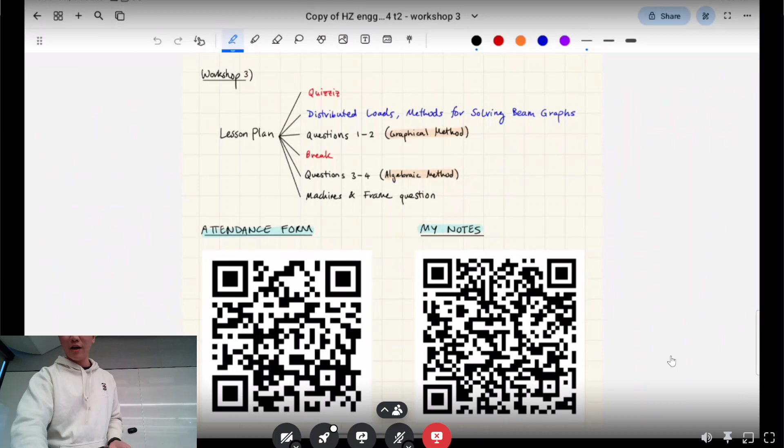Just to get the admin stuff out of the way first: the bottom left is the attendance form, so give that a scan and sign in for this week. The bottom right is my notes. I like to go a bit quickly sometimes, so if I scroll past what you're writing, you can always refer back to this. I've got the work-in-progress document for Workshop 3 up right now. That's what I'm going off of, but more often than not I'll make a little mistake and try to fix it up, which is why I call it work in progress. When that 'work in progress' label is off the name, you'll know it's the finalized document.

In terms of our lesson plan, at the start it says the quiz is first, but I'm going to change that real quick. We'll do the quiz after I go through the theory. Is everyone still scanning that?

This week we're going to go through distributed loads and methods for solving beams. The focus of this week will be beams, and then we're going to go through some questions as well. I'll teach you two methods for solving beams: one I like to call the graphical method, and one I like to call the algebraic method. I'm not sure if these formally have official names, but I'll go through each in more detail. At the very end of this week, I'll also cover machines and frames, and explain what those are in the context of this course and how it's taught in other schools.

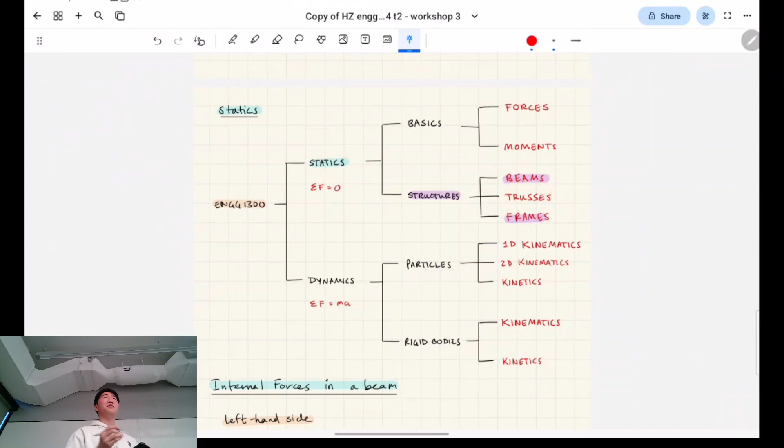In terms of our tree diagram of the progress of this course, I showed this the last two lessons as well. We're still in statics, which will be the first half of our course. Now we're getting more into the actual structures specific to civil engineering and structural design. We'll be talking about beams extensively this week, and next week we'll focus on trusses, assuming the course hasn't changed. I'll briefly touch on frames, but you won't be assessed on those until later in the course. The focus will be on beams. Interestingly, in the mech school they teach trusses before beams, but in civil school they teach beams first. They're both difficult in their own way, but for different reasons.

Okay, so internal forces in a beam. Basically, with Newton's third law, the free body diagram law essentially, you can slice the analysis of a beam such that it crosses over the middle of it. When you expose what's inside a beam, you'll see there has to be a counterbalancing force for the external loads. These are called the internal forces in a beam, and there's three kinds of actions that they have to counteract.

V stands for your shear force. Shear forces are like perpendicular loads, loads which are perpendicular to the beam. Remember, a beam has this axis that runs through it like that, so these are the perpendicular loads. N is our axial loads - we've talked about tension and compression, those are axial loads, and those will be represented using N.

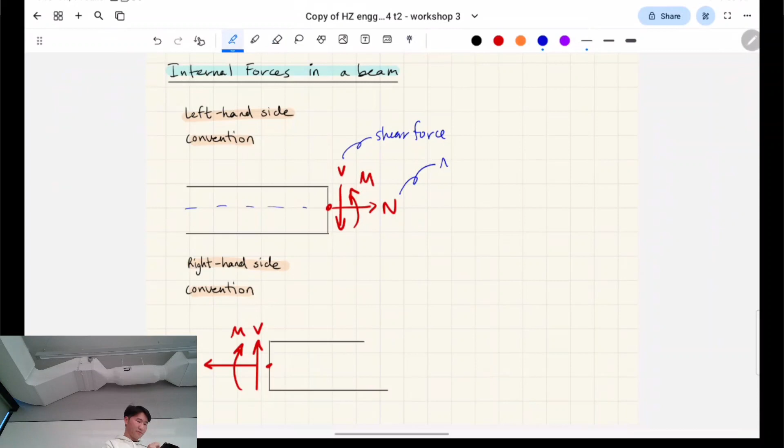And lastly, we have the internal bending moment, M. What's important is that we have a left-hand side and right-hand side convention, because when we plot out what we call the shear force diagrams and bending moment diagrams for beams, you have to graph along the beam, either going from left to right or right to left for it to work out. Generally I like to stick with left-hand side convention, but you'll see in one of the questions I've shown below that it's sometimes advantageous to go right to left instead.

Essentially, we're just using the tools we've been talking about over the last few weeks to solve these - that's the equations of equilibrium. We can literally just use these ones. Let me just move a few things around real quick.

You use the sum of the vertical forces equal to zero to solve for your shear force. If we take our free body diagram cut and expose the internal forces, those will be part of the forces we have to consider when looking at all the vertical forces, and we'll be solving for V, the shear. For the axial forces, we'll solve for N using the sum of the forces in the X direction. And the sum of the moments around the cut gives us M. This internal bending moment is happening about where the cut is - even if I draw the counterclockwise arrow going there, we're referring to this point here, exactly at the cut. This will make more sense when we see it in practice in the question.

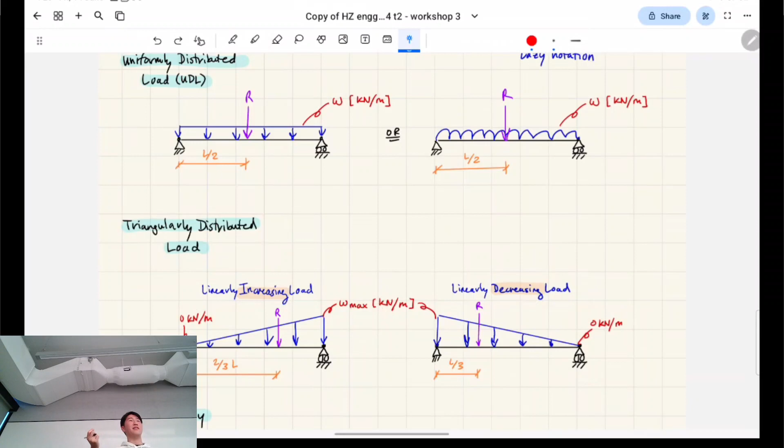If we get a bit more complicated, we have triangularly distributed loads. There are two types: linearly increasing loads and linearly decreasing loads. You don't have to be super technical explaining these, just know they exist. For a triangle, the magnitude is always 0 on one end. In the linearly increasing case, it starts at 0 going left to right. In the linearly decreasing case, it ends at 0 going left to right. The other side we call W max, because W can be graphed like a function, like in high school with x and y on a Cartesian plane. We replace this with W on the y-axis, and x still denotes how far along the beam you're going.

For a triangle, the center of force is 2/3 along the beam from the small side, or 1/3 along from the big side. You'll have to get familiar with that relationship. So for a triangle, it's always 2/3 from the small side or 1/3 from the big side, which is where the resultant force will be.

How do we get the area of this resultant force? If we viewed the previous one like a rectangle, we can view this one like a triangle. To get R, our resultant force, you multiply this axis by this axis and divide by 2 — area of a triangle, base times height divided by 2. When you get that area, that's R, and the location of the R point load is what I said earlier.

We get a bit more complicated when dealing with trapezoidally distributed loads. It's still linearly increasing or linearly decreasing. Instead of one side equaling 0, we have a minimum and a maximum for the distributed load magnitude.

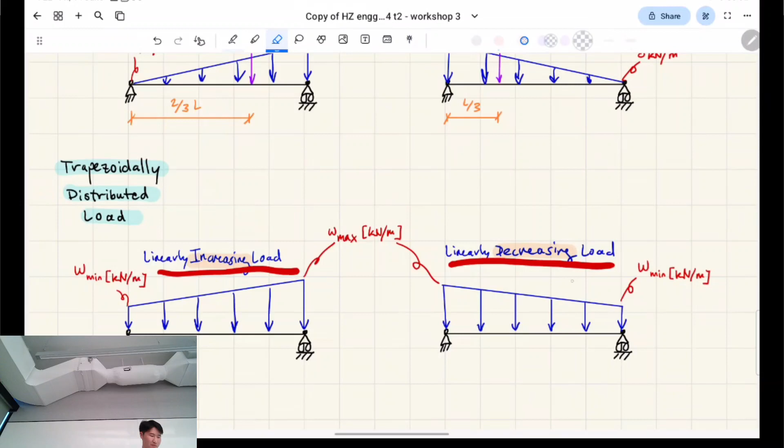Often, we can just divide these up into a triangle and a rectangle — that's how I'd do it, to avoid unnecessary integration in calculus. There's a principle of superposition in statics which says this trapezoid is the same as stacking a rectangle on top of a triangle. The resultant load for the rectangle is in the middle, and for the triangle it's 2/3 along from the small side. You can call these R1 and R2 and do your calculations from there, but this case is fairly rare — I doubt you'd get it on the week 5 midterm, though it's possible in the finals.

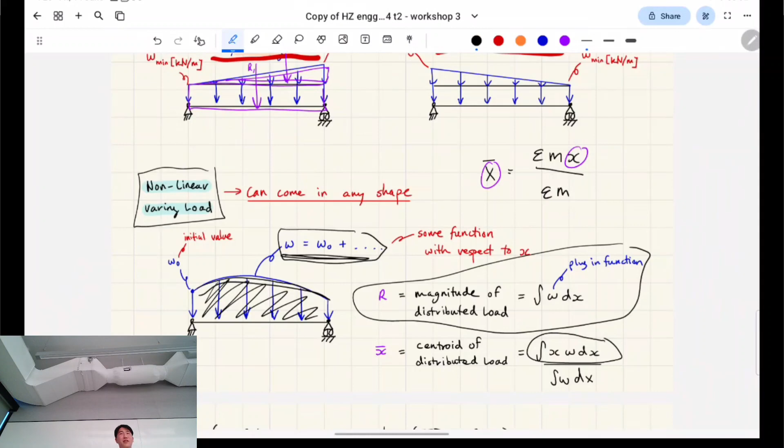This is just where it comes from - you don't need to memorize these integration formulas. But hopefully everyone understands distributed loads now, because we're going to need a pretty good understanding of it when we learn our methods for graphing bending moment diagrams and shear force diagrams.

Okay, I'm just trying to think about my quiz. I think I'll run through this bit of theory and then give you the quiz, because I'm not sure if this kind of theory is in my quiz, so I'll just be safe and go through it as well.

There are two ways you can solve bending moment diagrams and shear force diagrams, which I've been alluding to. First, for beams, you always solve for the support reactions using equations of equilibrium, which we ran through last week - that's actually only the first step in this bigger problem. All the content we learned last week is building up for this topic and the truss topic next week.

Next, we can choose one of two methods. One is called the graphical method, and there will be advantages and disadvantages of both. The graphical method is actually faster and easier conceptually to understand, so it's the one I'm going to teach you first. But it has limitations.

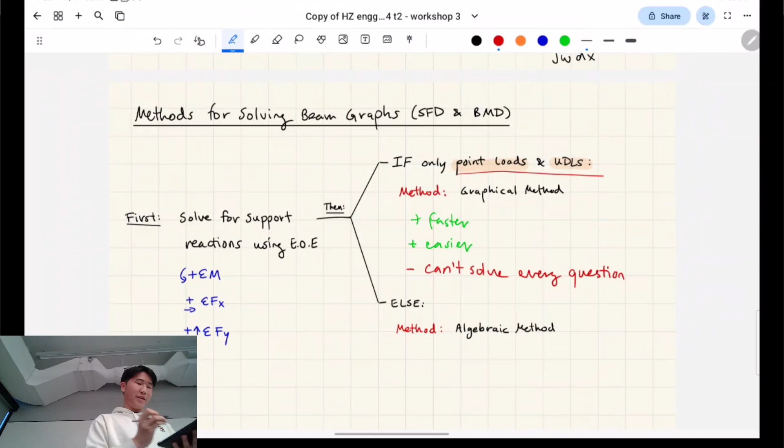It can't solve every type of question - it can only solve questions with point loads and uniformly distributed loads. So you have to be careful of what your external loads are, and then you can see whether you can jump straight into the graphical method or not.

Otherwise, you have to use the slower method, which is the algebraic method. It's also harder to conceptually understand - when I go through my explanation, I'll spend more time going through how this one works. But the good news is you can solve anything within the beams topic using this method.

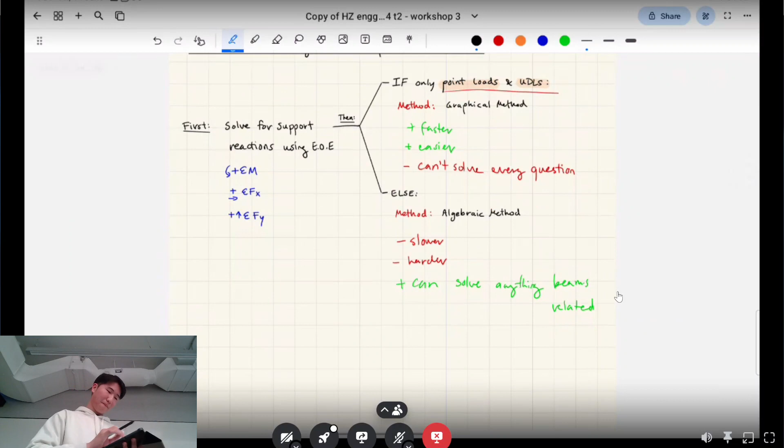Okay, let's bring this over to Discord. Basically, if you have some sort of setup like this, and you have a diagonal point load on your simply supported beam, let's say, there's basically going to be some sort of compression force acting on this part of the beam due to that horizontal loading. And there's also going to be some degree of shear force. Shear force is the perpendicular portion of the loads, and these reactions will kind of work this way.

Yeah, so for the shear force diagram, jumping ahead... okay, just for now, trust me. Those two are interlinked: the shear force diagram and the bending moment diagram. It's easier to show you why once you actually get to the questions. I can't think of a good example off the top of my head.

Okay, so yeah, I was talking about the non-linear varying distributed loads. That's like the curvy line one, or it can be whatever shape, right? The magnitude is just the area of it, essentially. And the centroid is, yeah, that formula I drew up before, but it says the integral of x times distributed load, divided by the magnitude.

I don't know, it's due on Tuesday. That's fair. What's up? Yeah. Oh, well, I don't, right.

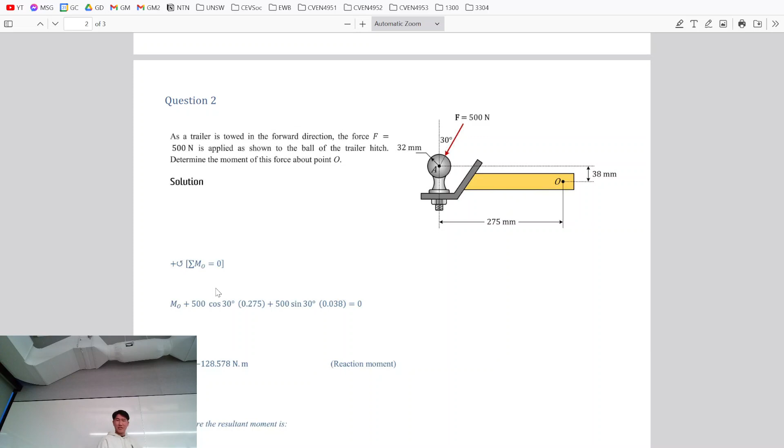Okay, all right, just continuing. So I just want to show you something because I remember getting asked about this at the end of last class. So there's a pretty good thought process which someone was talking about, which is that what if that force landed on the surface there, and so you use that radius to figure out the geometry, right? Which would kind of make a lot of sense. I think it's a contact force rather than a body force, but I'll just show you the answers here.

They consider it in the middle.

Yeah, I didn't do engineering studies actually, but you're probably right, like in high school. If that's a thing, you can look it up and have fun researching that. It's something to do with the law of transmissibility then.

Good point, yes. Okay, so just continuing on with the rest of this class, I guess.

So on the board, I've briefly written out the steps in your head you're going through to tick off to learn the content. I forgot my markers today, so I'm using the ones from this room, and they're pretty bad. The first one says you need to know what a beam is, which I realized I maybe didn't fully explain properly, so maybe we'll go over that.

And then you need to know what the internal forces are - that's what I was talking about. When you cut a beam through with your free body diagram section cut, you can expose those internal forces and see what kind of stresses are acting on the beam, right?

Then you need to learn the graphical method, which I'll teach you first in the first few questions, and then we'll move on to the algebraic method as well.

So maybe we'll talk about what a beam is, that'll probably help. Basically, in a structure, right, this is a frame - it consists of a bunch of different structural members. I've just drawn it in perspective view and 3D, all that. So beams are the horizontal members, generally, and they generally take gravity loads perpendicularly.

If you imagine the loading, they're designed to resist these kind of perpendicular loads, and you'll see in solid mechanics that the shape of these beams, the geometry, material selection and everything - they're optimized to resist these kind of perpendicular loads, because that's the main action which will be acting on it, right? That's what we're going to be analyzing. So I should probably just clarify that firstly.

So the horizontal members - generally there's not much reason for beams to not be horizontal. Perpendicular to the direction of gravity, basically, right?

Okay, so here's a beam, for example. In engineering mechanics, they're just going to chuck a bunch of beams at you that might not be super realistic, but they're like little puzzles - just mathematically and hypothetically, what would everything look like if we analyzed it with this scenario, etc.

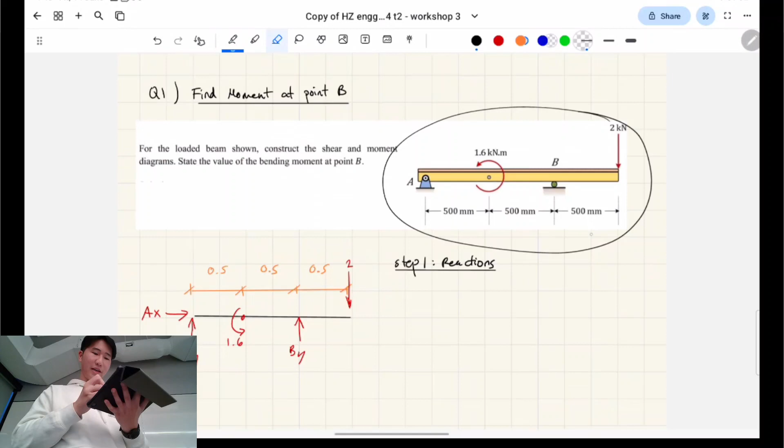Right, okay, so here's what our beam looks like. Just right off the bat, you can see this - does anyone want to guess what that is? Roller support - that's a roller support.

So it's a little different from the one that you might have seen that looks like that. They can come in a bunch of different shapes and sizes, but essentially they do the same thing - it's supposed to be there to resist just the normal forces, whereas the pin support is for normal forces and tangential forces.

And we also have our point moment, which you'll see how that interacts with our diagram. Do you remember last lesson we had that question towards the end which had that point moment, and someone asked, well, does it matter where a point moment goes in on a structure? Because will it just affect the structure the same amount regardless of where it's placed? You'll see that when we graph the bending moments, the position of where it is will matter.

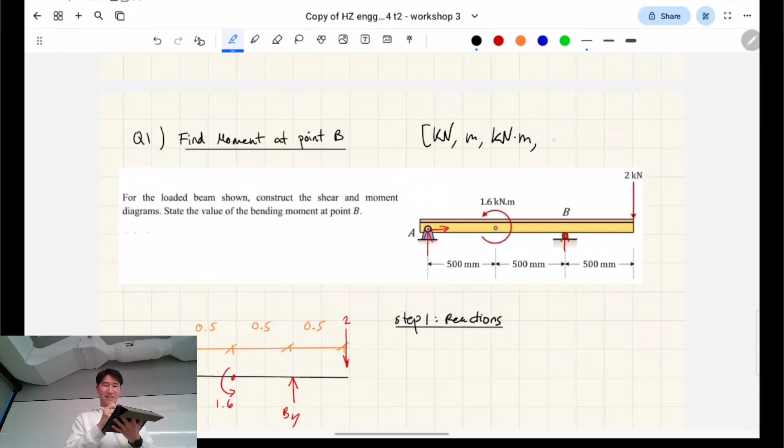Another thing to note is that everything is in mil right now, so what I've done is converted it into meters. Just makes it a little cleaner if we're working with everything in the same set of units - kilonewtons, meters, and kilonewton meters. Also, kilonewton meters is not the same as kilonewtons per meter.

So distributed loads are the ones that will use kilonewtons per meter. Moments are the ones that are going to use kilonewtons multiplied by meters. Okay, just keep that in mind.

Okay, so we need to - wait, let me just quickly pull up my notes because I'm trying to see how much this question actually needed to do. Okay, yeah, okay, basically it asks us to construct shear force and bending moment diagrams, as well as find what the value of bending moment is at B.

So this is like, what are the internal bending moments at that specific point? And with all of our graphs and stuff, we should be able to just locate that along the graph and say what it is. Okay, so I'm going to go through this relatively slowly because it's a new method.

Well, actually firstly I'll go through one part quite quickly, which is finding the reactions - just a little recap from last time. We're looking for these unknowns, and I'm going to outline where the lines of action of them are. So can someone tell me where you could take possible locations to take the sum of the moments about?

There's exactly 2 spots which will work: you take moments about B and A. If you take the sum of the moments about B, it eliminates these unknowns because the lever arms to them will be 0, and then you can solve for AY. And if you take it about A, you can do the same thing and solve for BY.

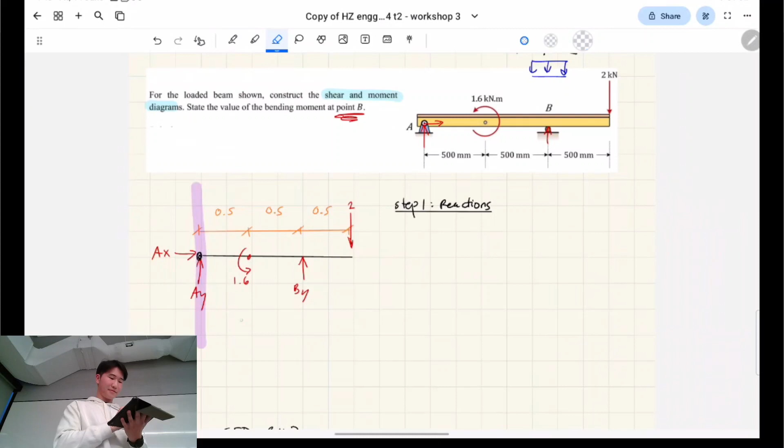Okay, so let's start by doing that. I'm going to take the moments about A. We have to account for this point moment first, right? That's straight up just going to be 1.6. It's going counterclockwise, so that's going to be added on. And then BY, that's this one, is going to cause a positive moment about A. So it's going to be positive. Its lever arm is 1 meter because 0.5 plus 0.5 meters is 1.

And lastly, we have to account for this point load 2. The point load 2 is going to cause a clockwise spin about A, and so it's going to be minus 2 times the lever arm, which is 1.5, 3 lots of 0.5. So we can rearrange for BY, and we get 1.4 kilonewtons.

We can also take the sum of the forces in the horizontal direction, and we only have one thing acting that way, which is AX. So that one's quite straightforward - that one's just 0.

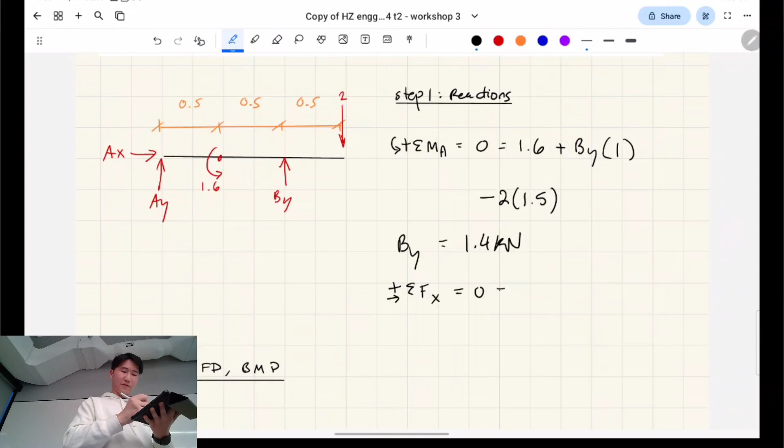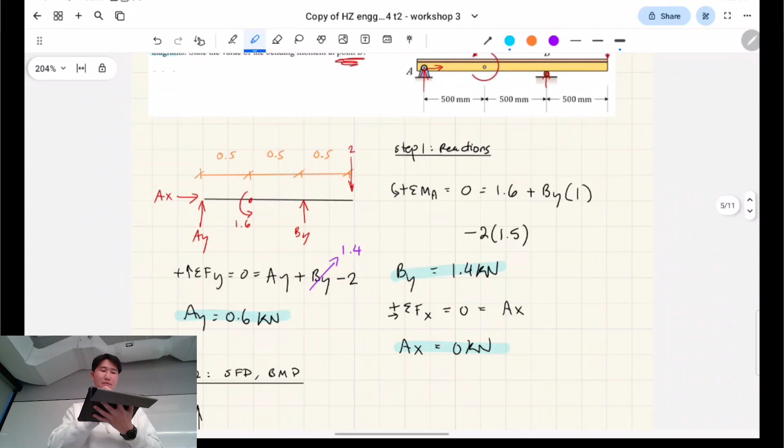Okay, and we take the sum of the forces in the y direction. Now we have to account for, we know BY, and we have to account for these. So for the sum of the forces, we don't take into account point moments. Going to replace this with what we solved for over here, which is 1.4. And we get that AY is 0.6 kilonewtons again. So now we've done the first step, which is solving for reactions.

That's the first step when you're solving a beam. Okay, the next step, and what we're going to spend a bit more time talking about, is shear force diagram and bending moment diagram. These two concepts are related because we care about the perpendicular loads acting on the structure, and how they cause bending.

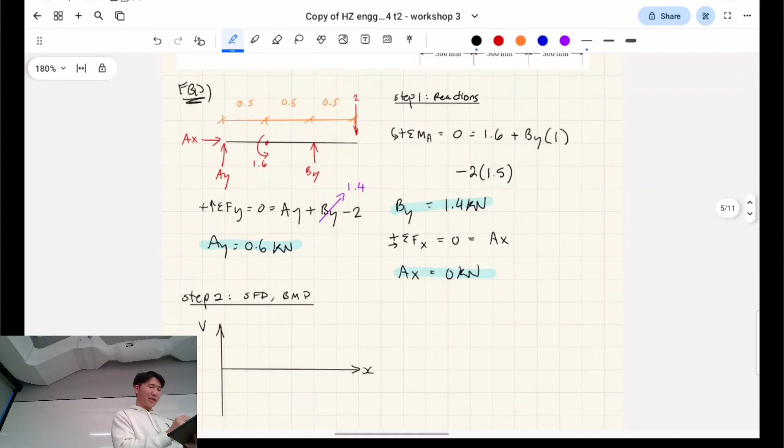Okay, so let's focus on the shear force diagram first. You graph it like you would in high school maths for the x and y plane, and on the y-axis we're going to be graphing V. So what I've done, how I like to do it, is this is called a free body diagram - what I've simplified our little schematic of the structure to be. I've drawn it here, and it's a good habit to draw the shear force diagram and bending moment diagram right underneath the free body diagram. Do you see how it lines up vertically?

The reason for that is you don't need to double up on drawing your geometry, so it saves you time. So this leftmost point represents the leftmost point on the shear force diagram, do you know what I mean? And we're going to be doing things left to right.

So essentially, are you guys familiar with piecewise functions? In the algebraic method, you'll see the breakdown of how we're going to construct essentially a piecewise function for the entire beam. So what that means is, in maths, you have the functions, and then this for x is whatever between these amounts, and between these amounts, and between these amounts. We're constructing that, but in the graphical method, we speed up that process because we don't need to find all those functions quite yet.

Okay, so what we do in the graphical method, here's the rule: when you have a support reaction which is positive, and the arrow is going up - so it's AY - you literally go up by that amount when you're going left to right.

So this is 0.6, and the shear force is in kilonewtons. We start at 0, it jumps up immediately, there's a discontinuity at the point force, which is the support reaction, to 0.6, and then since there's no other actions happening, like no distributed loads, it goes across flat and gets to b.

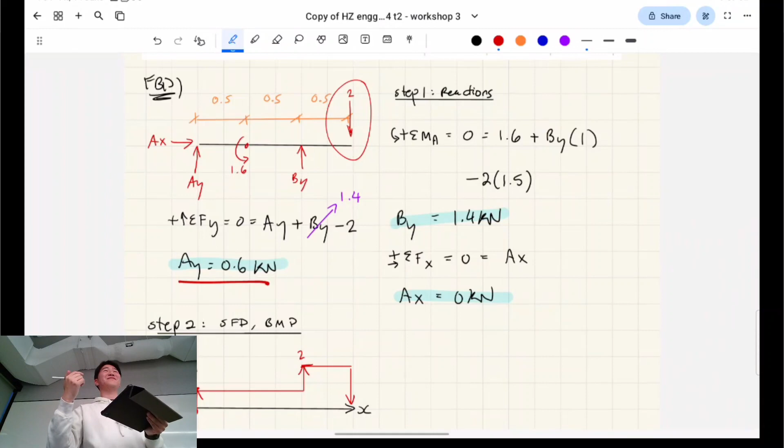So that makes sense, maybe? Yeah, so you can see where I kind of constructed this graph from. This goes from 2 to 0, essentially, right? And that's our completed shear force diagram. If we go back to the original schematic, it looks like that.

So the bending moment diagram is actually the integral of the shear force diagram. But now there's a kicker because we have to incorporate the point moments as well. The shear force diagram is unaffected by that point moment of 1.6, however, the bending moment diagram, we do have to account for it.

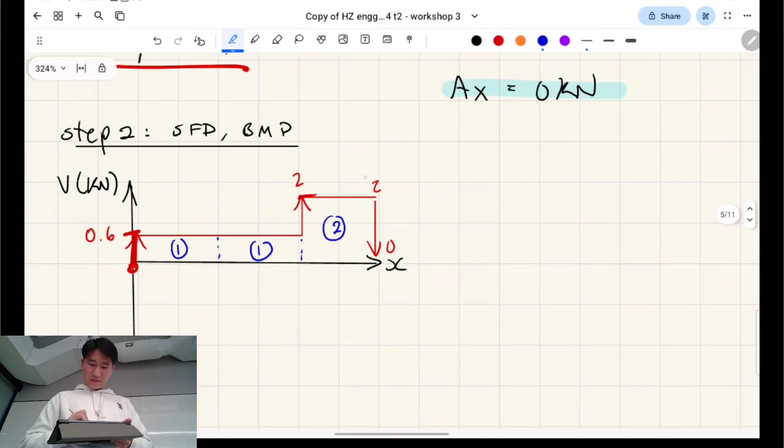So what I'm going to do is literally break up my shape into smaller shapes, in fact 3 smaller shapes. Normally for a question like this that doesn't have a point moment right here, I would break this up into only 2 rectangles. But what I've done is like this because this point moment almost breaks up our beam further in the bending moment diagram. You'll see what I mean, hopefully.

So you literally calculate the area of these. Remember that all of these are 0.5 meters, and these are in kilonewtons. So the area of shape 1 is the area of that rectangle, which is 0.6 kilonewtons times 0.5 meters. So what units does that give us? Kilonewton meters.

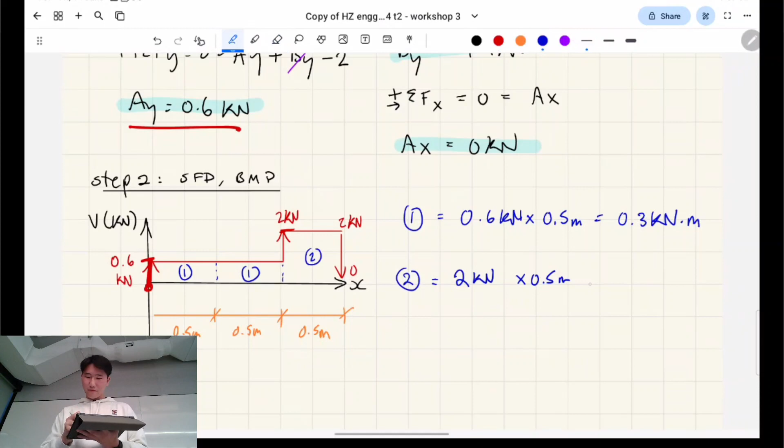You see where this is going? Since it's in kilonewton meters, this is going to give us the values we need for our bending moment diagram, which will be in kilonewton meters. Okay, shape 2, it's 2 kilonewtons times 0.5 meters - oh sorry, I wrote kilometers. Yep, that gives us 1 kilonewton meter. So, how this plots onto a moment diagram is...

Basically, this part of the shear force diagram is positive, and our moments are going to follow. How do I explain this? Okay, basically, I'll split the beams. Here's what it looks like: it slopes up slowly, so the bending moment starts at 0.

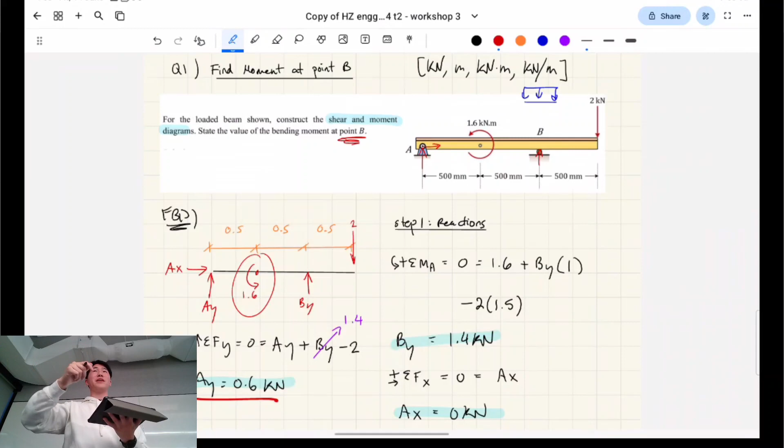And it slopes up, and the magnitude it reaches at that point is 0.3, which is what we calculated here. And then here's something to remember: this is a positive point moment, but using left to right, using our graphical method, this is going to result in a downward spike instead of an upward spike. It's a little bit counterintuitive, but it goes down like this. So a positive point moment will make us go down.

So that's 0.3 kilonewton meters. But now we have to subtract off 1.6, which is our point moment. That's the point we're at now. Now it'll increase by another area of 0.3, and goes to here. So that goes to... it's negative, negative 1.3 kilonewton meters. Now it's at negative 1 kilonewton meter.

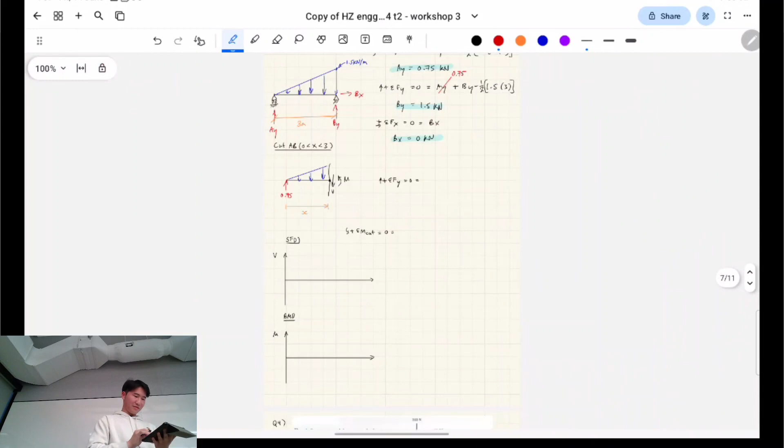Far out, keep changing colors. Okay, and now, maybe it's better if I draw it like this. And finally, we add on, from negative 1, we add on another 1, and that's the area of 2, so that goes to 0. So all of this area on this graph is positive bending, and all of this area is negative bending.

Okay, that's our graphical method.

Question: I got lost after you said you're dipping down from 0.3 all the way to negative 1.3. So, oh yeah, you can't see it on the shear force diagram because it's not due to a shear force, it spikes down because of our point moment. You said it spikes down, and then why did we go back to 1 again?

Why did we go right to negative 1? Oh yeah, I see what you mean. So we added another rectangle of 1.

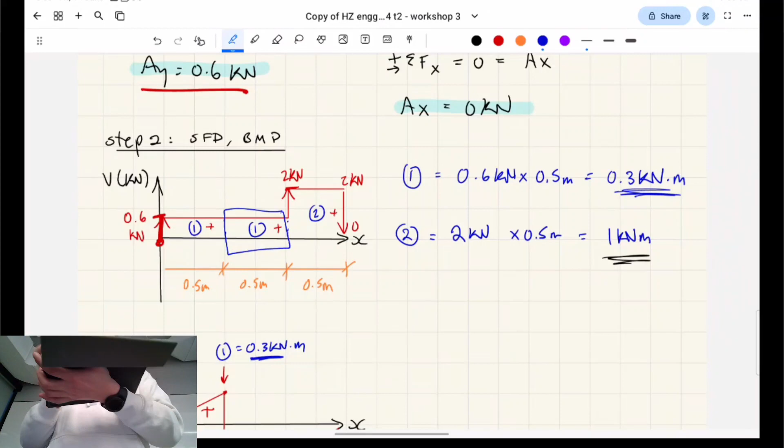That area is 0.3. So it goes from negative 1.3 back to negative 1, it's over that area. Then we add the 1 back up, so it's back to 0. Because this area is bigger, the magnitude's bigger, so it goes from negative 1 back to 0.

Yeah, thank you, I didn't do the best explanation for that. If you guys have more questions, yeah.

Why is our force graph split to 3 parts, not like 4 or 5? Force graph, are you talking about the shear force graph here? Yeah, it's a good question.

So I've basically split it up into the minimum amount, the minimum amount of splits that's not redundant, I guess. You could split it up further, so say you split up this, but the idea is that I only care about the critical points on the bending moment graph. So since these follow a different slope, because of the change being different, if that makes sense, I've decided to split it up like that.

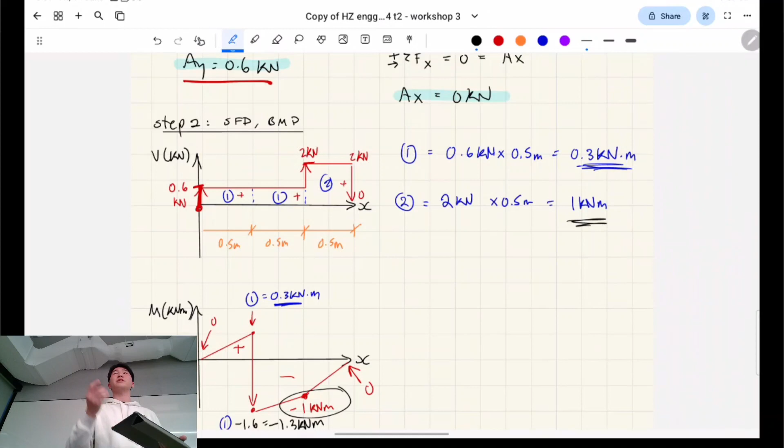Again, this is something that comes with practice questions, you'll get the hang of it pretty quickly. I've skipped a lot of steps in my explanation, and some of the derivations actually come from the algebraic method, which I'll explain further on. But the idea is this graphical method, even though it might not be intuitive right now because you're seeing it for the first time, this is actually the easier method to understand, and generally you grasp the concept quicker. I found when I teach this one first, so we don't really know why yet on why these things are the way they are, but we know what they'll look like, and we know the fast way of doing it. Do you know what I mean?

Yeah. Are we okay to keep going? Yeah.

Oh, the question also asks for what is the bending moment at point B, right? And point B is right here. It's negative 1. So the graph will tell you exactly what the internal moments are at every point along the graph, very kind of elegantly, I guess. So that's the advantage of the bending moment diagram.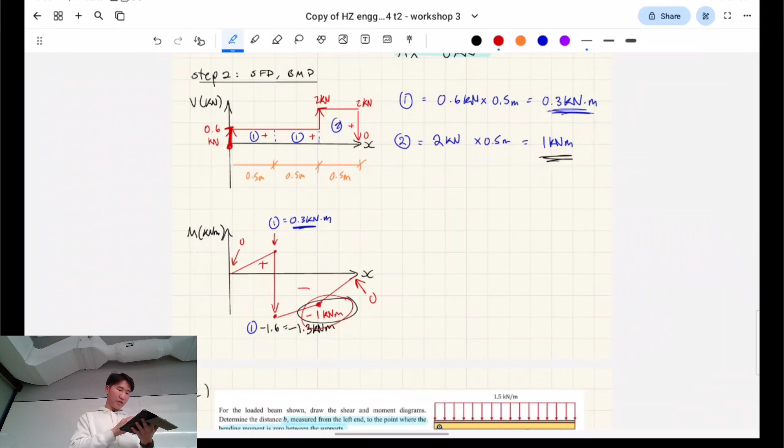It tells you what all the external forces are doing and how extreme they are. So if you wanted to find what the max bending moment was along the beam, you look at all your bending moment diagrams, and then you're like, okay, well the max moment is negative 1.3 because that's the highest magnitude moment along my beam, and you can design for that in structural engineering.

Okay, do you guys have any more questions right now? Okay.

So here I've got another example. So this is like a beam. I've got a question: is it a simply supported beam?

You reckon it's a yes? Okay, so this is the, you reckon it's a no? Uniformly distributed.

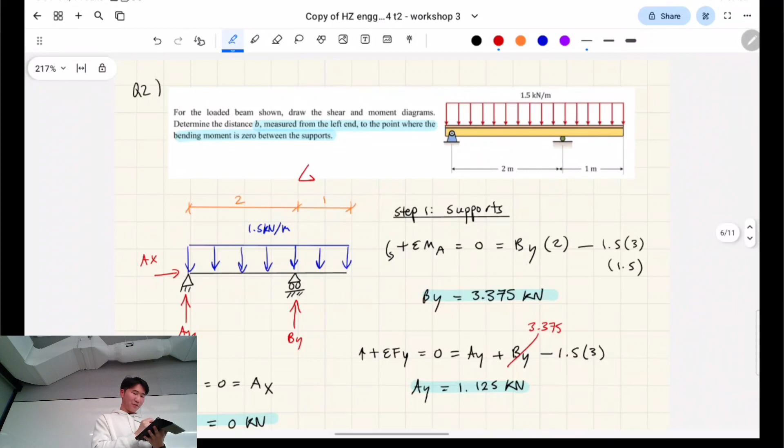Oh, the external actions, which are like the uniformly distributed, that doesn't affect whether it's simply supported or not. It's what the supports are. But with that said, it's actually not a simply supported beam, because a simply supported beam's definition is the supports are at both ends.

So what we actually have is two different spans of the beam. This is called a continuous beam now, so we have that regular part, and then this is called a cantilever span of this continuous beam.

Okay, so we draw the shear force diagram and moment diagrams, and we also have to determine the distance b where the bending moment is 0, right? Yeah, so how are we going to do this?

Well, first we determine the support reactions. I've actually skipped this step because we've seen it in the last question, but it's the exact same thing. You do all your equations of equilibrium and you can find what those values are. So now we basically know this, this, and this, right? This is going to help with drawing our shear force diagram and all that.

Okay, so now we have a shear force diagram, right? This is the meat of it, right? Because AY is 1.125. Is this going to go up or down from left to right along our shear force diagram? Yeah, so we go up by 1.125, right?

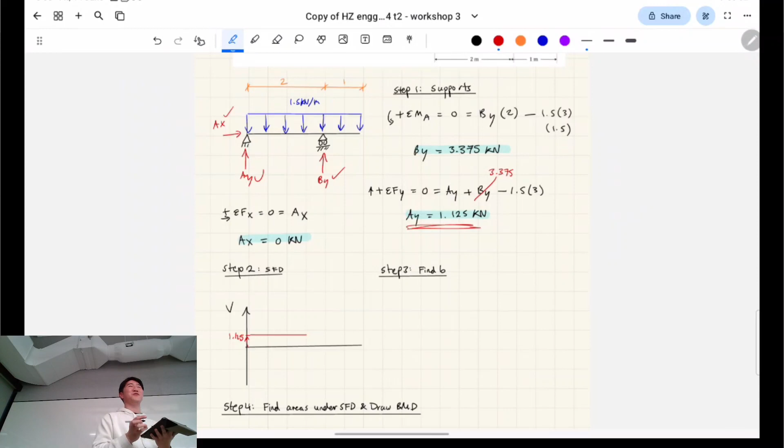Okay, now we haven't seen a uniformly distributed load act on a beam yet, right? So is this going to go horizontally like that? No, because essentially this distributed load is going to keep weighing down on the beam as you go further along it, right? What that means is that you're going to go down like this by a slope equals the distributed load, which is 1.5 kilonewtons per meter, right?

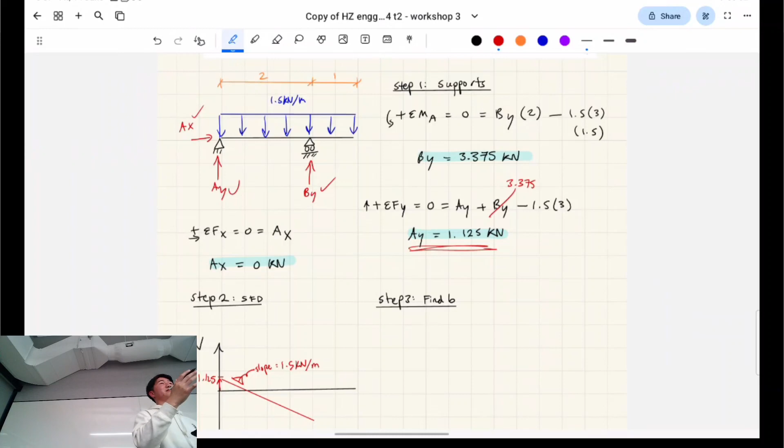The other thing about how the civil school runs this course is that they don't actually care whether you use the graphical method or the algebraic method. Because the graphical method is faster, generally you can get away with using the graphical method and still get full marks in a quiz. So I'm teaching you the lazy way because it will still give you full marks. The longer way, well, anyway - in the finals you might need to know it. But for the midterm coming up in week 5, I'd focus your efforts on learning the graphical method, to be honest.

So we go down, and then the question is, what is this number here? How far down have we gone? Well, the way you calculate this is your starting number, 1.125, and you have to subtract that distributed load, 1.5, multiplied by how far along we've gone, which is 2 meters.

So this number here is negative 1.875.

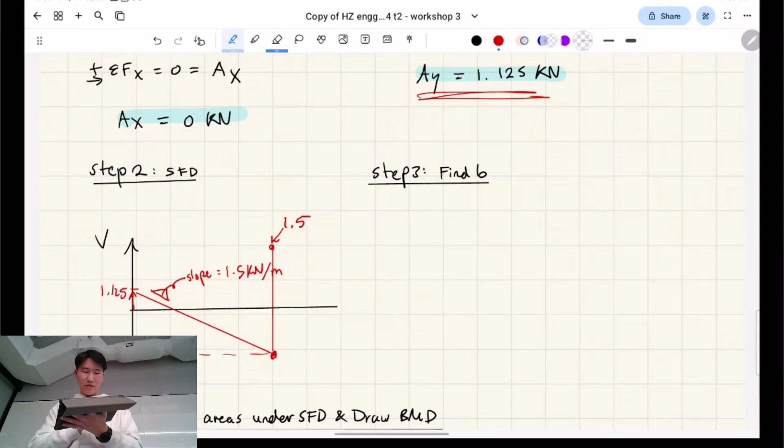Next, we have this roller support, and this support reaction will go upwards by 3.375. So this will jump from negative 1.875 up to 1.5. All you do is take this number and add 3.375 to it, and find what that spikes up to.

Then lastly, we have the same distributed load, so the same slope acting downwards. I should probably draw it like this. And it caps off and finishes at 0. This should make sense because we have our shear force discontinuities at the point loads, including our support reactions, while the rest of the beam is continuous in terms of its slope.

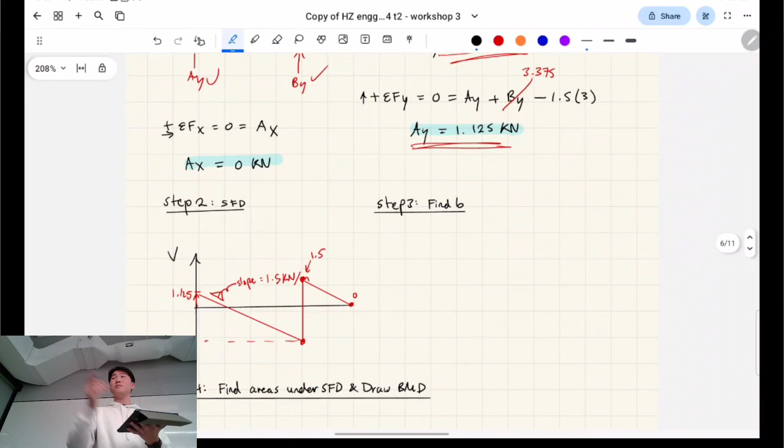Could you explain why it goes back to 0? Oh, yep, good point.

The distributed load acts down at a slope of 1.5 kilonewtons per meter - though I didn't explain that geometry happened to be 1 meter. The idea is that if you have a simply supported beam like this, you expect the shear force diagram to look something like this, where the support reactions are where the discontinuities are, but it still ends up being 0 on both ends. So when you move that support in like that, you expect the shape to look like this, but it always finishes at 0 on either end, regardless of whether it's a discontinuity or not.

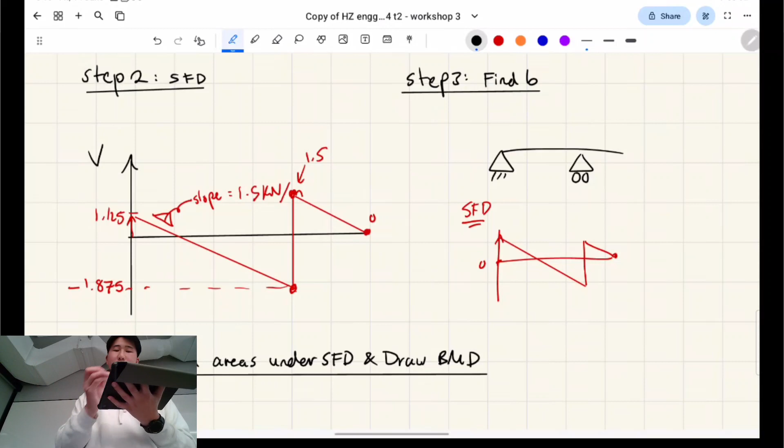Okay, does anyone else have a question? Yep, good question. Is gravity negative because it's a force pushing in a clockwise direction, which is negative moments? Oh, is that why it gets more negative?

I don't want you to think about moments yet, because we're just analyzing the up-downness of the forces - that's the shear forces. When we look at the bending moments, then you're thinking on the right track.

Here's the trick with the graphical method. We know that this is positive, this is positive, this is negative, this is positive. What I'm going to do is find the area of all these. What's the problem with that? Well, when we split up this triangle, you're going to struggle to find what B is. That distance B is currently unknown, but there's a way to solve it using a technique called similar triangles - I'll show you what that means. But firstly, just know that this geometry here is 2 meters.

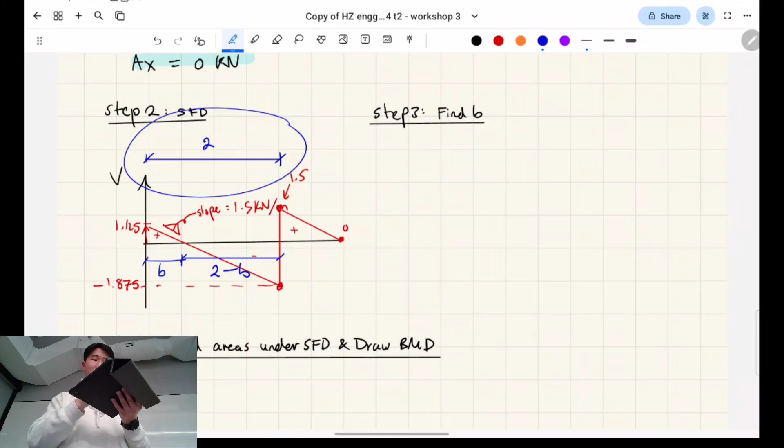Let's call the distance from the left support to where the shear force is 0 as B. This distance here we know has to be 2 minus B, because if the entire thing is 2 meters, you subtract B off. So if we have a triangle that looks like this, and a triangle that looks like this, we can compare their slopes.

And because this is uniformly distributed load, they're going to have the same slope. So this is a bit of information we know about the unknowns. So we literally compare the rise and plug that in.

So the rise is 1.125 here, and the run is B. So B is what I've called this distance here. That's going to be equal to, down here—actually the maths works out better if you don't put a negative here. We're just comparing the slopes of these triangles as if they were oriented that way. If that makes sense. I don't think that makes sense, but you take the absolute value essentially of that magnitude. And we call that distance 2 minus B.

Does this part make sense so far? We can actually just use algebra now to solve for what B is. So we cross multiply to get rid of the fraction. And you can see it's pretty trivial to work out what b is when we solve it on a calculator. It's 0.75 meters. So 0.75 meters from the support on the left, that's where we're going to have zero shear force.

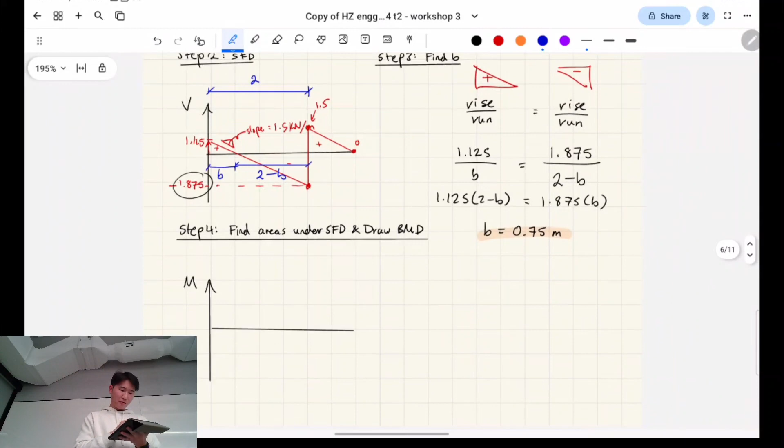Now we can label these triangles, and we can solve for those magnitudes for our bending moment diagram. So what's the area of that triangle? Well, the area of a triangle has to be half base times height. So b is the base, and the base is 0.75 meters, and the height is 1.125, from over here on our graph. That results in 0.422 kilonewton meters.

For triangle 2, which is this one here, we do the same thing, so we make it half, but I like to include the negative here. You can do it in terms of magnitudes, but I always make mistakes, so if it's a negative triangle, include the negative when you're doing the calc. And our base is 2 minus b, so it's simply 2 minus 0.75 meters.

And our height is going to be this one. Technically you could have done the negative over here, that makes more sense in your head, but yeah. That one is negative 1.172 kilonewton meters.

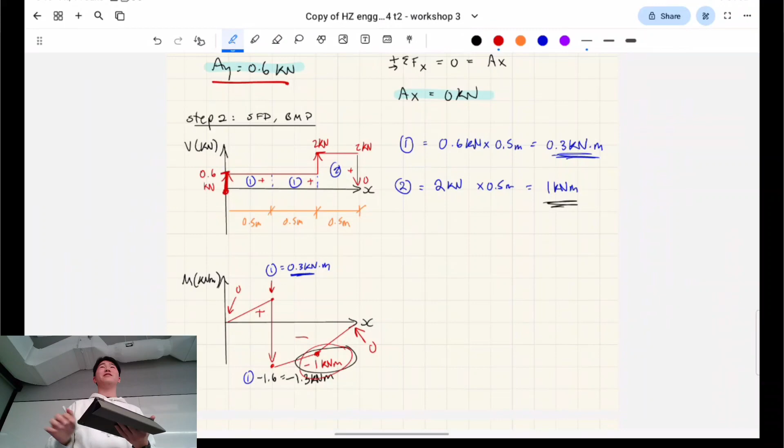We're just going to implement this and do the exact same thing. However, what do you think the shape of this bending moment diagram will be? Because before, if I scroll up, we had a shear force diagram which is made out of blocks, and the bending moment diagram was triangular. So if we have a triangular shear force diagram, what is our bending moment diagram going to be?

I'm hearing a few different answers. The answer is parabola shaped. So our shear force diagram will inform the slope of our bending moment diagram. In areas of zero shear, that's where you're going to have a flat part of your parabola. Got it?

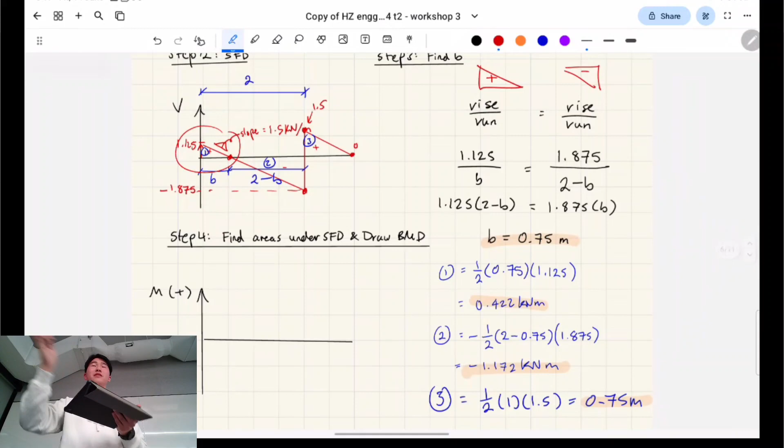If we consider upwards as the positive direction, which this course prefers—in future courses it actually flips upside down, they'll explain why—but in this course we'll take positive moments upwards, the intuitive way. Basically, if we start with a positive shear, we could start by going upwards like that. The slope of it—does it look like this, or does it look like this?

It's decreasing, exactly, you're right. So it starts with a non-zero slope. It starts positive and then decreases eventually until it's flat, which is the area of zero shear, or the zone of zero shear. And it keeps negatively decreasing like this, and then it's going to have a sudden jump in continuity. It's discontinuous, and it's going to change directions entirely and increase again. Where the shear is zero, it slowly becomes flat again, like here, so it's flat here and it's flat here.

Okay, got it? This is probably confusing the first time you see it. Again, a lot of practice will make this relatively intuitive. Sorry, could you say that again?

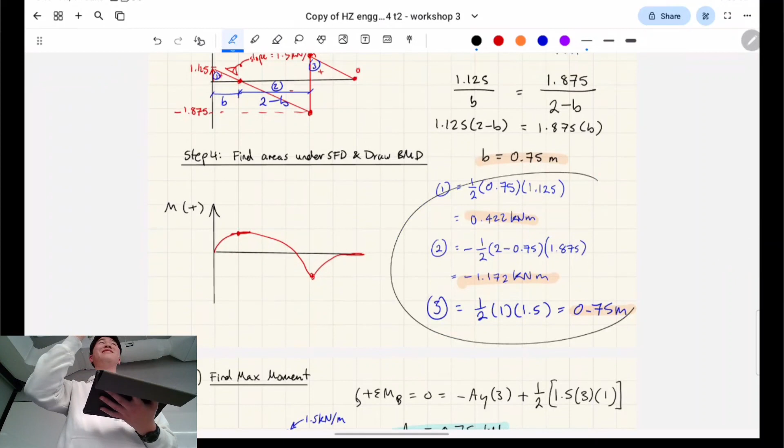It's actually okay. Well, here's the thing: once we do all these calcs and add them up properly, it will be 0. But assuming there's no point moments, your bending moment diagram is actually continuous the entire time, firstly. So there's no sudden jumps here. That's the first thing you need to know. And the other thing you need to know is that the start and ends will always be 0, same with the shear force. So the leftmost one and the rightmost one will start and end at 0, and the bending moment starts and ends at 0 as well.

Okay, let's figure out these numbers. So this number here, at b distance away, so we go 0.75 meters, is going to be equal to area 1, right, so that's 0.422. The next one here is going to be 1 plus 2, which is 0.422 minus 1.172, okay, that's negative 0.75. And finally, 1 plus 2 plus 3, because this is negative 0.75, you'll see that when you add on 0.75, that just nets to be 0. It's equal to 0.

Does anyone have any questions about these methods? Okay, so we're going to keep going, and it's only going to get harder. So if you have questions, you should ask now, I guess. The algebraic method is slightly harder, that's all. But okay, you know what, I'm just going to keep going.

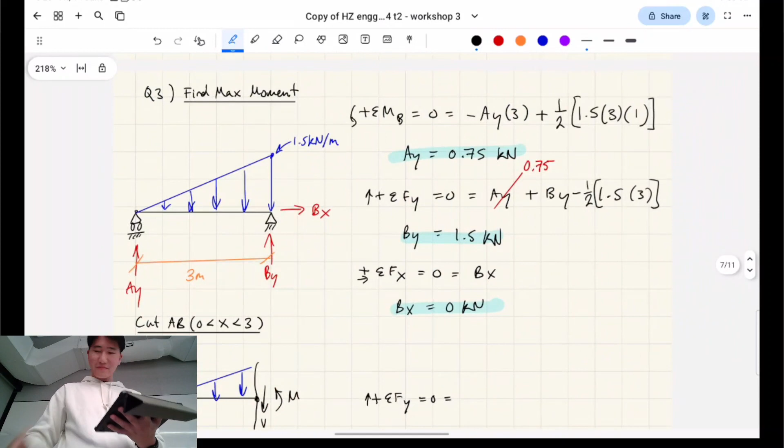So question 3 here: what type of distributed load is this? Triangular. Okay, so I'm going to use this to illustrate our other method, which is the algebraic method, and where all the derivations come from, and why I've been talking about the left-hand notation for internal forces and stuff.

So the first step is we find all of our reactions. That part's straightforward enough. The only thing you really have to consider is that to find this distributed load, you find the area of that triangle. And for the moments part, the location of it will matter. So here I've done some of the moments about B. So that distance there will be 1 meter, because it's 1/3 of the length from the big side. So that's what I've done here, that's basically that triangular distributed load.

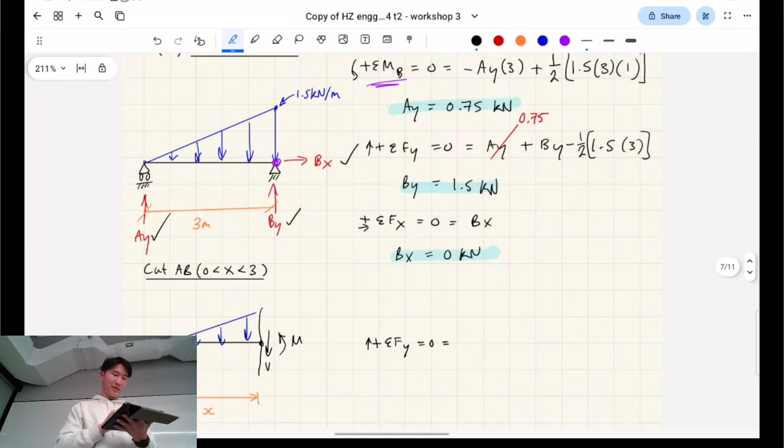Next, here's the notation. So what I'm going to do is I'm going to cut. So we call these nodes along a beam, we've been calling them points, we can call them nodes. So the point on the left of this beam is called point A, or node A, and the point on the right is called node B. So when we make a cut, it has to refer to 2 nodes, so we cut AB, that's also called member AB. If we cut along it, we draw it like this, essentially.

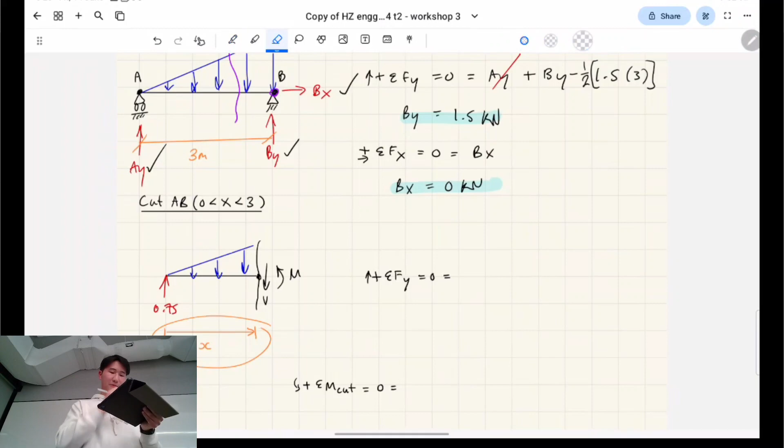And what we're going to do: firstly, 0.75 is the reaction at A, that doesn't change anymore. What happens is we need to create a function for shear force and for bending moment, with a varying distance x. So that's what I've drawn along here, I've drawn a kind of coordinate system for what x is. So over here, x is equal to 0, and as x moves along, etc. So if I scroll back up quickly...

You know how I was talking about these internal forces in a beam? This is where it's actually going to kind of matter. So we're basically just drawing this, but down there. This is our cut, that's what we call the cut. And I've exposed a bunch of the internal forces. I haven't actually drawn the axial force arrow, it still exists, but why do you reckon I haven't drawn it?

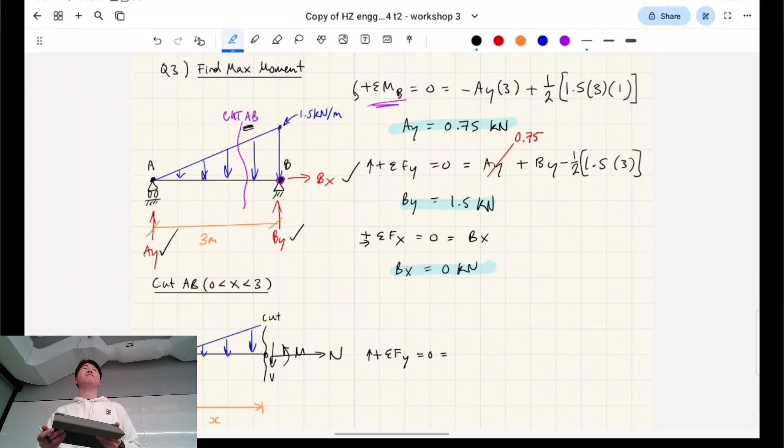The axial force is 0, and it doesn't apply to the shear force diagram.

There's something called an axial force diagram, which will be relevant for frames, and also technically for trusses, because trusses take on axial forces. But for beams, at least in this course, axial forces aren't critical. So I don't care about the axial forces—I only care about the shear forces and the internal moment, because these inform our functions for the shear force diagram and bending moment diagram.

So what we know for a fact is we know the slope. Over here, we have a rise of 1.5 and a run of 3 meters, so we actually know what the slope is.

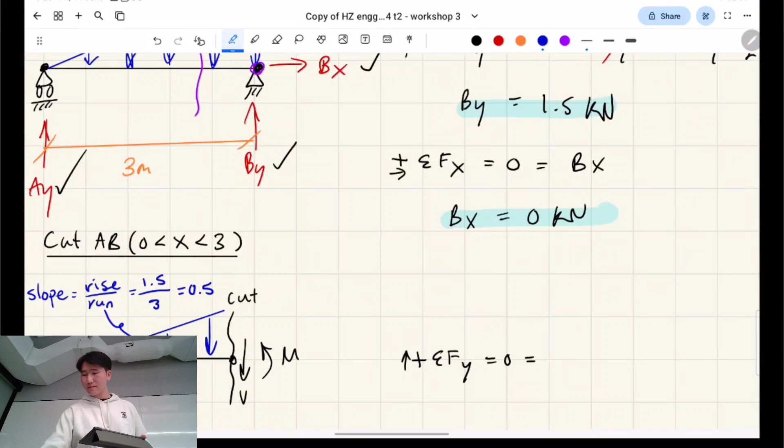That's 0.5. One thing I should note is for this question, you have to use the algebraic method—you can't solve this using the graphical method anymore, and I'll explain why at the end. As soon as you see a triangularly distributed load, you have to launch into the algebraic method and do it the long way like this.

Next, we can find what this varying distance is—I might draw it in purple. What I'm trying to represent is the magnitude as it's moving along the beam, so that means the slope multiplied by the run. That's how you get that magnitude: 0.5, which is our slope, multiplied by x—our slope multiplied by our run.

Now we have to take the equilibrium—the vertical equilibrium, but account for our shear force. Our moment we can treat almost like a point moment, so it's not included when we take the sum of the forces. We take the sum of the forces including this downwards V shear force, so it's going to be negative because it's acting down, in this convention.

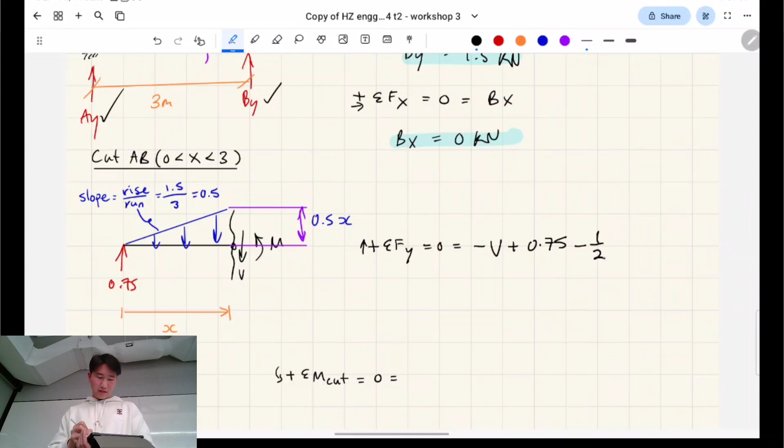So half—the base is simply x—and the height is going to be 0.5x, that's the slope multiplied by the run, or the base again.

Following? So that's how we get this shear force. So we rearrange for V.

These x's actually multiply together, and this is what I'm talking about. Basically, if you have a triangularly distributed load on your free body diagram, when that gets moved across into a shear force diagram, it's going to become a parabola. When that gets moved across to a bending moment diagram, it's going to become a cubic. That's why it's very difficult to do using the graphical method, because graphing a cubic is quite difficult without knowing the exact function of it.

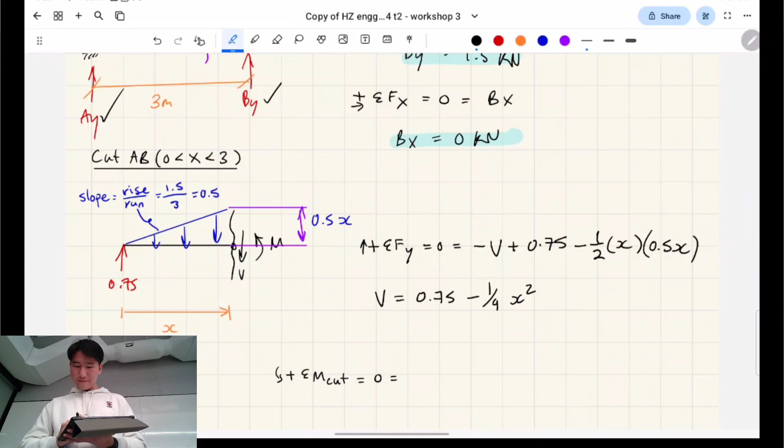X is equal to... okay, I think I'll leave it at that for now. I'm going to highlight that—this is our function, a generalized function for shear force.

Next, we're going to analyze the bending moments. This moment is acting at the cut, and we pretend it's almost like a point moment, and it's going counterclockwise, so it's going to have a positive moment. This reaction, which is acting upwards, is causing a negative spin about the cut. So we're taking the sum of the moments about the cut, and it's going to be negative, and it's going to be 0.75 times the lever arm, which is x.

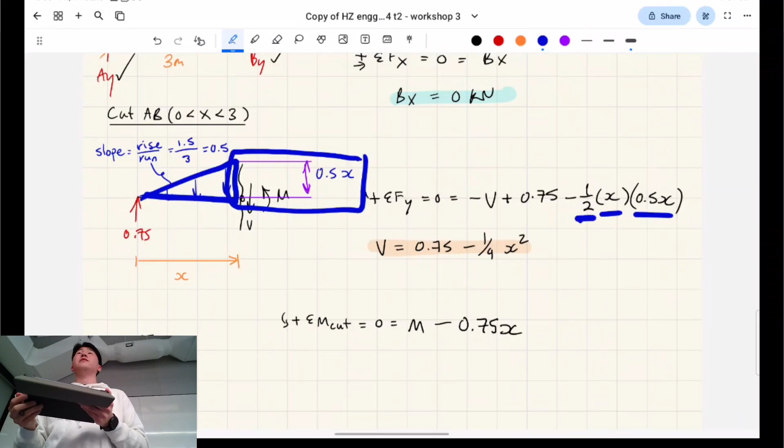We're analyzing this triangle, and we know that the magnitude is going downwards, so we take half base times height. The slope just affects what that height of that triangle is for a varying distance. This triangularly distributed load is acting straight down.

Oh yeah, V is the internal shear force. Yep, so we're graphing.

I think it'll make more sense when these functions move on to the shear force and bending moment diagrams.

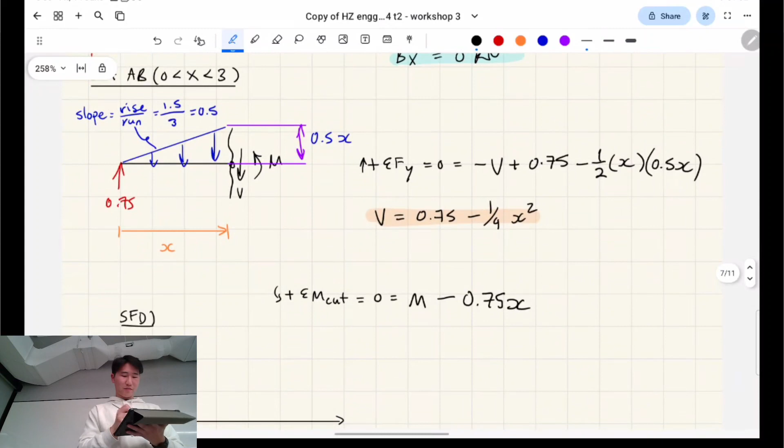Okay, so bear with me guys. So we're at sum of the moments about the cut is equal to this, right? Which is the internal moment minus 0.75x. So that's that times the lever arm of x, right?

Next we have to do this triangle, right? And it's 2/3 along the length, right?

So we have to do this. So the magnitude, okay, that's the magnitude. I'm literally just going to copy the magnitude over, right? Because we're looking at this triangularly distributed load, and that's our magnitude, right?

It's multiplied by, okay. Sorry, one second. Okay, let me think of how to explain this.

So we're analyzing sum of the moments about this cut here, right? And we actually already have the magnitude from the shear force calculation. What is this lever arm? X on 3, very good.

So all we have to do is multiply this by x on 3. That's our lever arm. And it causes a positive moment, so it's a plus, right?

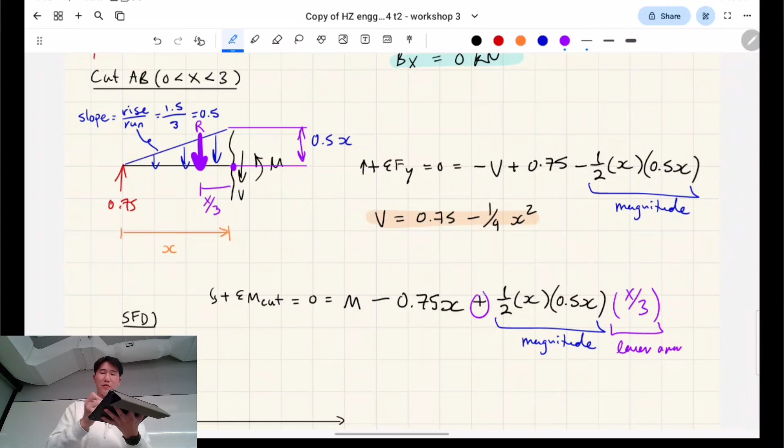If I rearrange for m, right, we get this: 1/12 x cubed. So we have a cubic bending moment function, right?

Okay, let's map these out on the bending moment diagram and the shear force diagram, right? Okay, so as we've said, we start with... this is why it helps to learn the graphical method first, because you'll know how these support reactions kind of work when you're graphing it, right?

This will jump up by the reaction AY, which is 0.75, right? And now we can graph it. Yep, did you have a question?

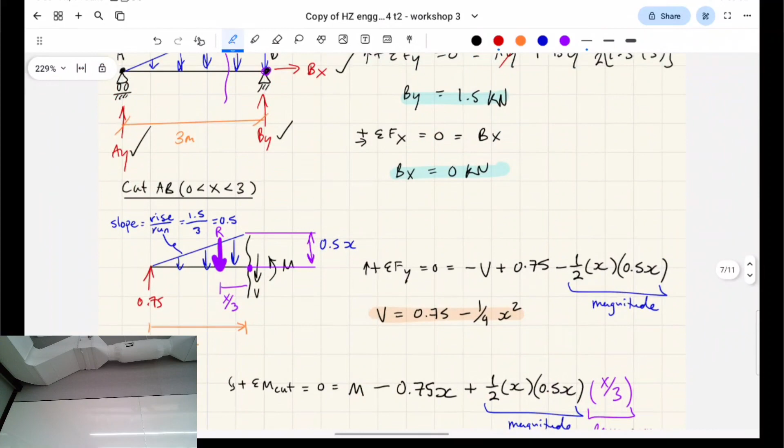Sorry, what do you mean? These questions, and then I'll talk to you after class about that. Okay.

Okay, so what shape do you reckon the shear force diagram will take on if it starts at 0.75? Remember, this was the function to graph it. Anyone? It's a parabola, very good.

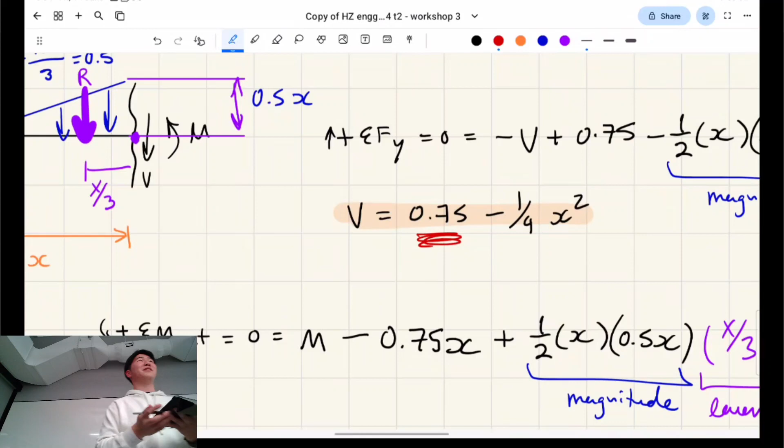And so we actually have a lot of information just by looking at this function. Firstly, the y-intercept — if this gives you any kind of flashbacks to maths, this is the y-intercept. And then we have a negative x squared, which indicates kind of a sad face parabola, right? So it'll look like this.

Okay, one thing to note is we know what By is. By is 1.5. And so we know that this will end on 1.5, negative 1.5, and then jump to 0 because of our understanding of the shear force diagram, right?

So the question is, actually what I'll do is — what we've done is we've graphed the shear force diagram. I'll graph the bending moment diagram, and then I'll discuss this distance here. Let's call that B, right?

Because in the graphical method, when you get up to this stage, it's very difficult to find out what B is, right? Because it's a function of some parabola, right?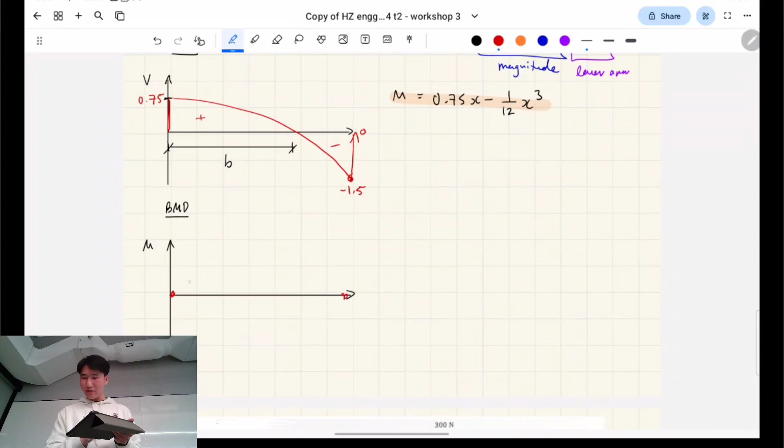Okay, so moments will start and end at 0 and be continuous, right? So our shape, it's still a cubic, keep in mind, but it will actually look like this. It's kind of like a wonky looking parabola where the middle isn't quite the apex, right? So again, it will actually look like this.

And this will line up with our location B for where our max moment is. Okay, so basically we're graphing this. Far out.

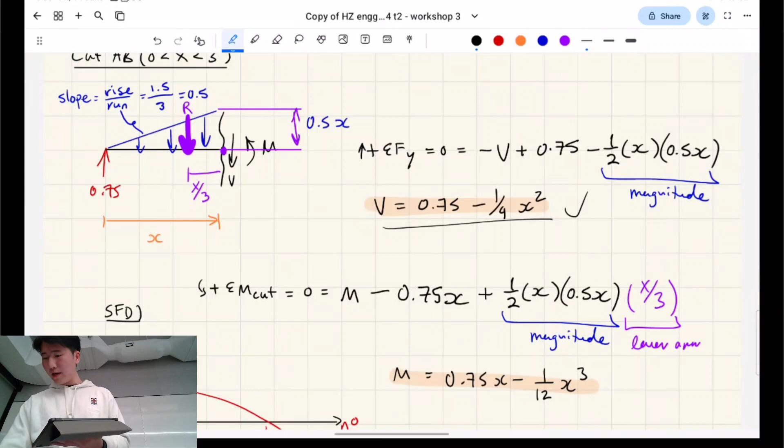Okay, what I might do is I'll solve for B. Okay, so over here, right, we're looking for the value of x that causes a shear force of 0, right? So we do 0 is equal to this minus this, and we're solving for this value of x, right? Because we're looking for what this value for b is, right?

You rearrange it. You can find it quite easily since we already have the functions, right? So x is equal to 1.732, right? So that is 1.732.

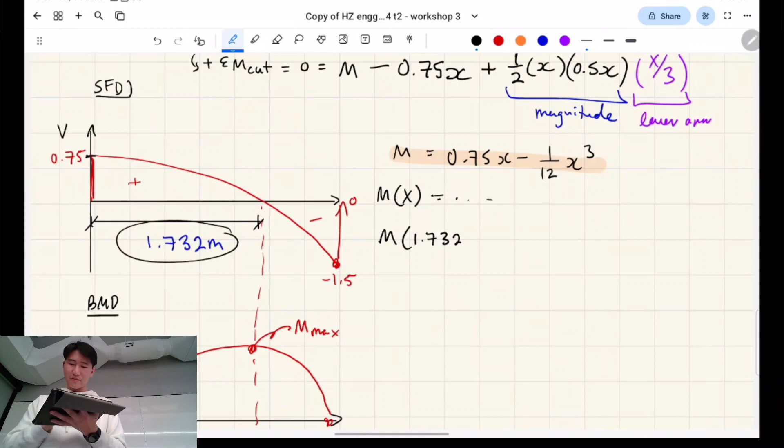Right, now what we can do to find this max moment, all we have to do is plug in this value into our equation. So this is a function of x, right? Mx is equal to all that stuff. What we're doing is we're plugging in this value of x, and that's just a matter of whenever you see an x, you chuck in that, right?

And it's cubed for that part. That will give us that the max moment is 0.866 kilonewton meters, right? Okay. Yeah, so that's the algebraic method.

Yeah, you got a question? In our civil workshops, when we tried the first two questions, we didn't deal with x's, but in this example we're considering that a distance from a certain point to where we cut is x. So when do we know when to use a number versus when do we use x?

Oh, so x will represent a variable distance. So if you're solving for a function like this, you need to keep it generic, as a variable distance. And then what I've done to solve for all this stuff, for example, I wanted to find the moment at 1.732, so I've plugged that value into this generic function. Hopefully that answers your question.

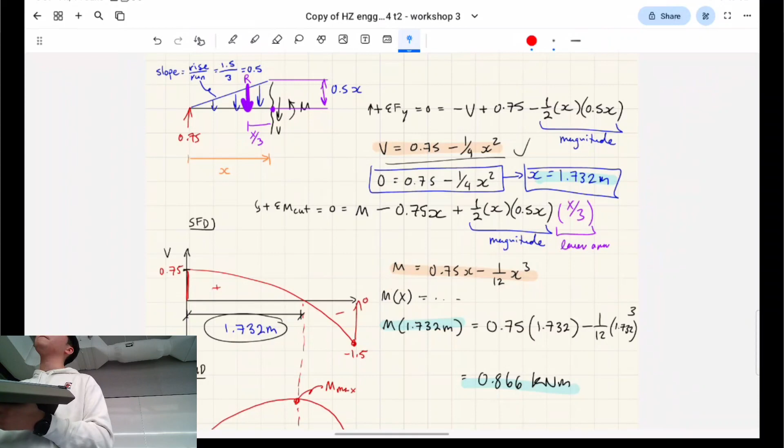I'm not quite sure what you're asking, sir. Like in some of our workshop questions, the first two, they asked us to find it at a certain point, so we did not really use x when we derived the formula. While here we're using x. So I'm just confused which approach to use when. Yep, okay, good question.

So basically, you're asking when do we need to solve it with a variable distance x, and when do we need to find the moment at a specific point, like b. So we're doing it the long way, the generic way, which can solve for any point, not just the moment at b. That's also the one that helps us graph the bending moment diagram, because we're deriving the entire function. It's incredibly flexible—you can plug in different numbers and output different numbers.

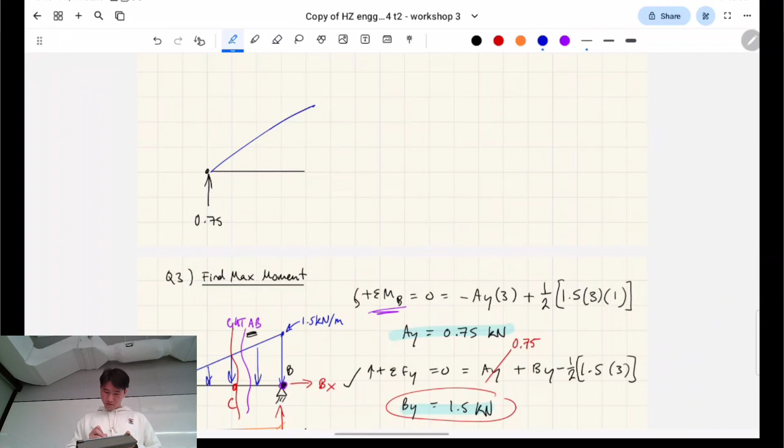For the exact point b, the difference in method is, let's call this point 2/3 along C. We would do the same thing with a cut. Okay, sorry, let me add a page and redraw this. So say we want the bending moment, the internal bending moment, at point C.

Oh, so we have a random number instead of x? Yeah, you have a fixed distance now. So it's not a variable distance. And you do the same thing—you just take the bending moments about point C, which is still the cut, and you'll get the right answer. But it'll only give you one answer instead of a function which you can plug any number into. Do you know what I mean?

Does anyone else have any questions with this method? Sorry, this workshop's gone a little rogue in terms of my flow and pace. I'm just going to run through this next one theoretically because it's going to take a while and run us over time.

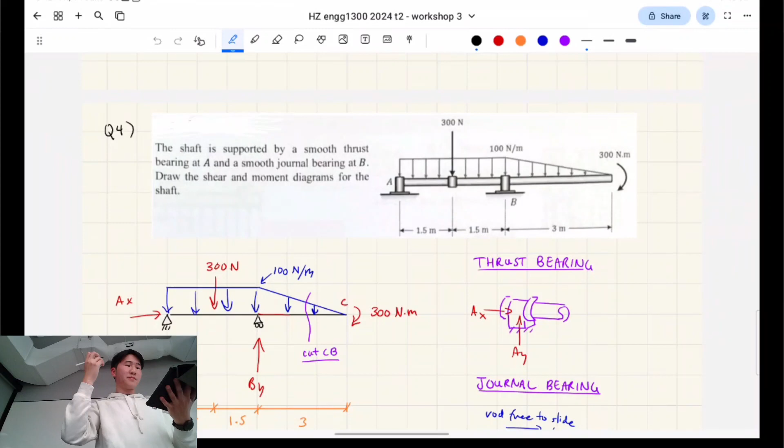So this last question here—we have quite a difficult looking question. There's a point load, a triangular load, a point moment, and these things, which are called smooth thrust bearings and smooth journal bearings.

These again are mathematically the same as pin supports and roller supports. So this one holds the rod at one end, basically a pin support, but lets it rotate and stuff. Whereas the journal bearing lets the rod slide through, so it acts like a roller support essentially.

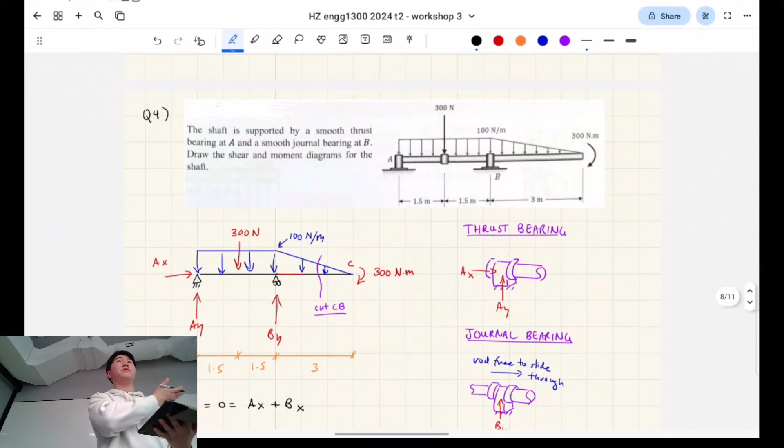Essentially this question is a good one to practice. I've got all the solutions up on my notes, so when you go home and potentially practice this—because there's a lot of different types of loading on it—you're going to run into kind of a problem.

So if you cut left to right, say we do cut AB and go that way, that's going to be fine. But then if we go cut BC and call X going that way, what type of loading is that? That's a trapezium now. And trapeziums, we know, are much more difficult to deal with than triangles.

There's a way you can solve it—divide it into a rectangle and a triangle. But then it's like you split it into two loads, and it's just annoying. The other way you can do it, which I've done here, is go right to left. If you go right to left, now it's a triangle, so you save yourself a lot of work.

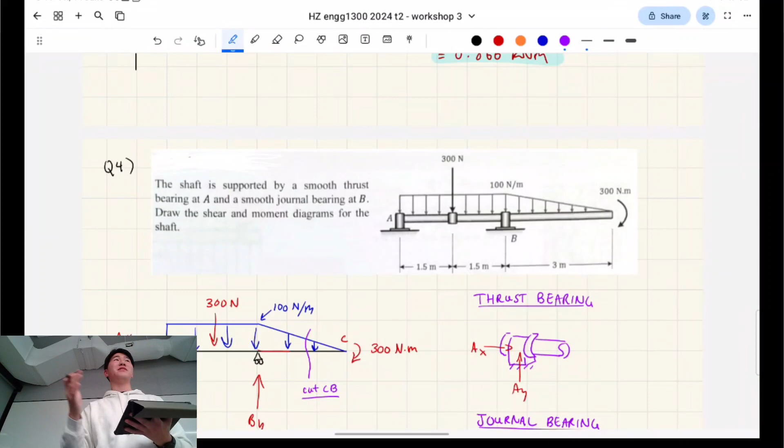So I'll kind of run you through the solutions as we do this. But what I've done is I've actually decided to do the left part in the graphical method and the right part in the algebraic method, so you can mix and match if you like. So the other thing to note—is that true? No, that's not true. Okay, this is what I mean—my notes will have a lot of mistakes.

For support reactions, I haven't done the graphical method calcs below because it requires so much less working. So what I've done is the triangle but right to left, using the slope to work out that vertical part of the vertical magnitude.

You get a function for V and a function for M, right? Then you actually graph right to left as well. So whenever x is 0, it's the rightmost part, and then increasing goes that way.

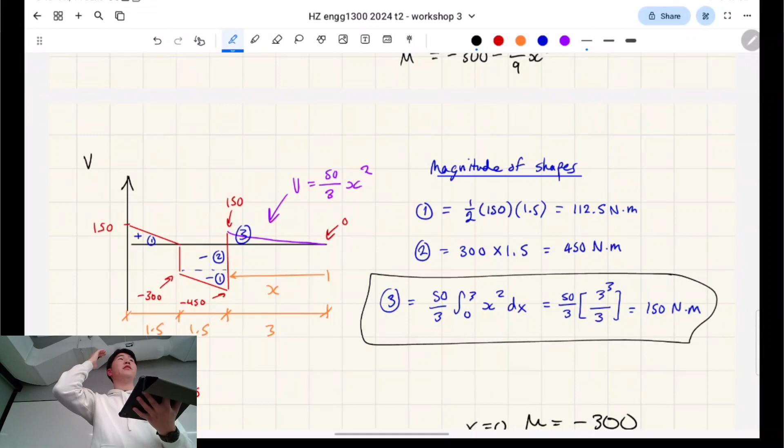I did this just to show it off, but you can use integration when finding the magnitude if you have the function already. But with the graphical method, this part of the beam here, you can do just using the graphical method, and it looks like that.

Lastly, I want to show off machines and frames. Let me give you the context first. In civil school term 2, 1300, you technically don't need to learn about machines, but you do need to learn about frames. Mathematically, they're very similar—they rely on something called hinges, which are like a pinned joint. You'll see this pop up next week when looking at trusses as well, with this pinned joint giving you additional information to solve it.

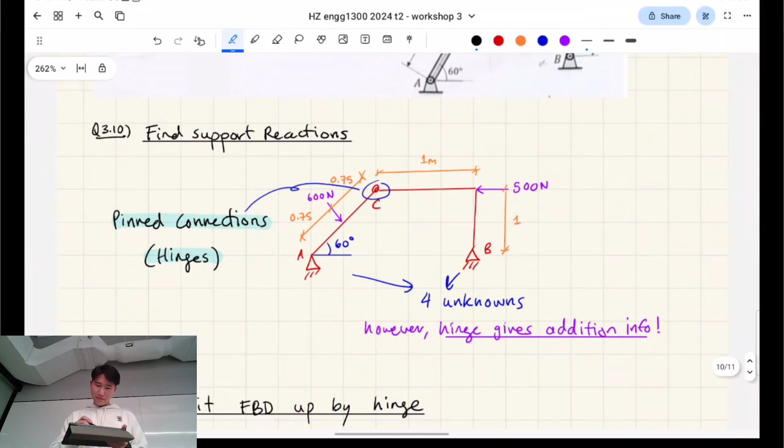So here we have two pin supports. If you think about the lines of action, these don't line up essentially. If you take the sum of the moments as is, you're going to run into problems because you're going to have two unknowns—it's going to be difficult to solve.

The trick is that at the hinge, you can split up a machine or a frame by the hinge. Hinges give you additional information, and then you can solve simultaneously. So here I've drawn this part of the machine and this part of the machine separately—that's this part and this part, split up by this hinge. This hinge has a support reaction acting at the joint, but it's equal and opposite.

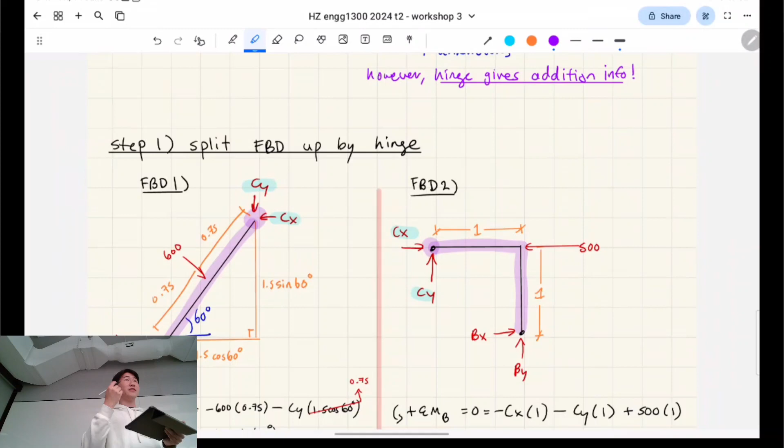I've called it Cx, Cy because it acts very similar to a pinned support, but it's a joint, so it's not fixed in place—it can move around like that. On the other end where you're splitting it up, you just have to make sure these reactions are equal and opposite. When you solve using your equations of equilibrium, you'll get simultaneous equations you can solve like that.

With machines, we care about the support reactions. They're basically hard structures to solve, but we don't care about the bending moment diagrams or shear force diagrams like we do for a beam. Just finding the support reactions is actually quite difficult by itself for these kinds of things.

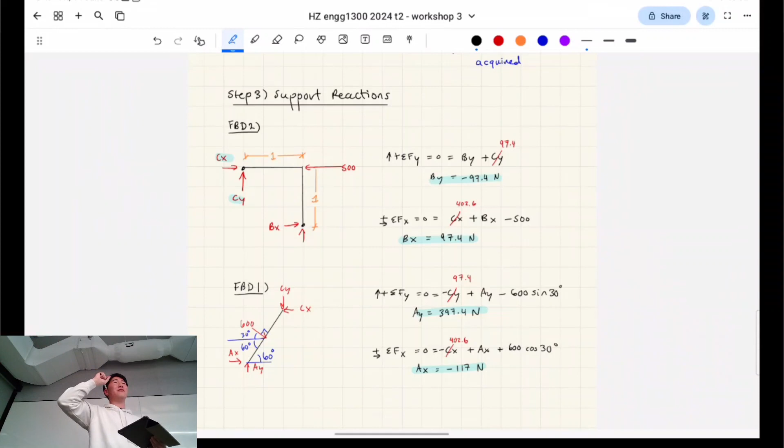So that's as hard as it gets for statics in this course, basically. But I'm just warning you ahead of time—if you want to learn about how hinges work properly, I've given you an example there.